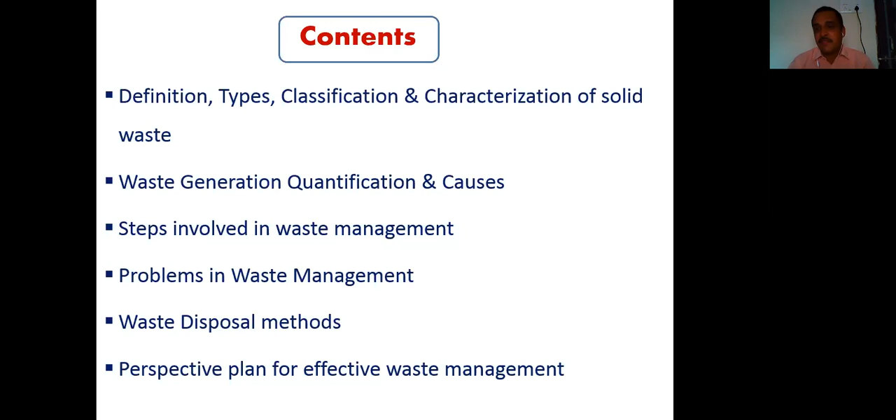Then there are different types of waste disposal methods which are currently practiced in different urban local bodies or urban centers. And at last, I'm going to suggest some perspective plans or better steps for effective waste management. So we are going to study them one by one. Firstly, we will study what is meant by solid waste.

The term solid waste is any unwanted material which is thrown out into the environment by human beings. For example, we bring a biscuit or a chocolate from a shop. We consume that biscuit or chocolate by tearing the wrapper. And after consuming, we throw that wrapper or the packet of the biscuit in our dustbin. That wrapper or packet itself becomes waste. It's a simple example of solid waste.

Then there is another definition. There are a number of definitions. The waste which is generated in a solid state, particularly as a result of various human activities, that is, residential or commercial activities, and which is normally described as useless or unwanted material, is known as solid waste.

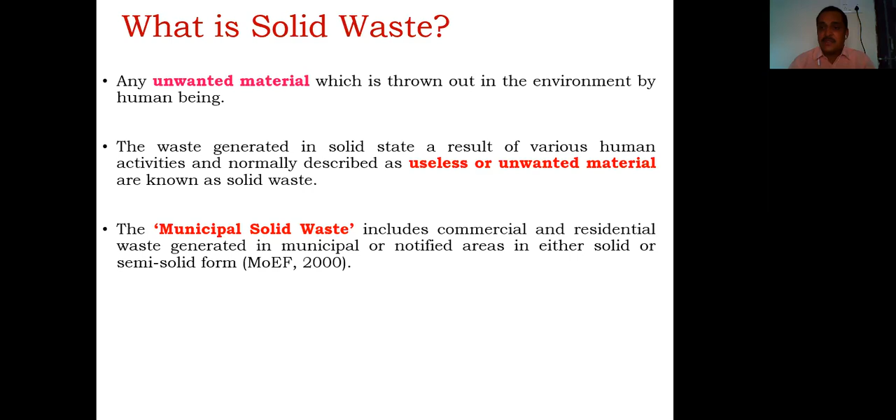According to the Ministry of Environment and Forest, the term municipal solid waste includes the commercial and residential waste generated in municipal or notified areas, meaning the waste generated in the jurisdiction of a municipal council or municipal corporation. These wastes are recognized as municipal solid waste, in either solid or semi-solid form. So these are some common definitions of solid waste.

Then in the next part, there are different types of solid waste which are recognized. For example, municipal solid waste. In a previous slide, we have already studied what is meant by municipal solid waste. That is simply the waste generated in municipal notified areas or in the jurisdiction of a municipal corporation.

The second type of solid waste is industrial waste, the waste generated during the manufacturing process. We are processing the raw material and preparing a final product or byproduct, and what remains after that processing is called industrial waste. The characterization of industrial waste depends upon the raw material used, the manufacturing processes, and other aspects involved in that particular industry. That means it varies from industry to industry.

Then there is a third type of waste, called hazardous waste. Hazardous waste means waste having properties like flammability, ignitability, corrosivity, and carcinogenicity. These are some common properties of waste recognized as hazardous. Another type of solid waste is electronic waste. We use different electronic gadgets or appliances in daily life, and after the completion of their life cycle, or due to some unavoidable reasons, we throw them away and they become electronic waste.

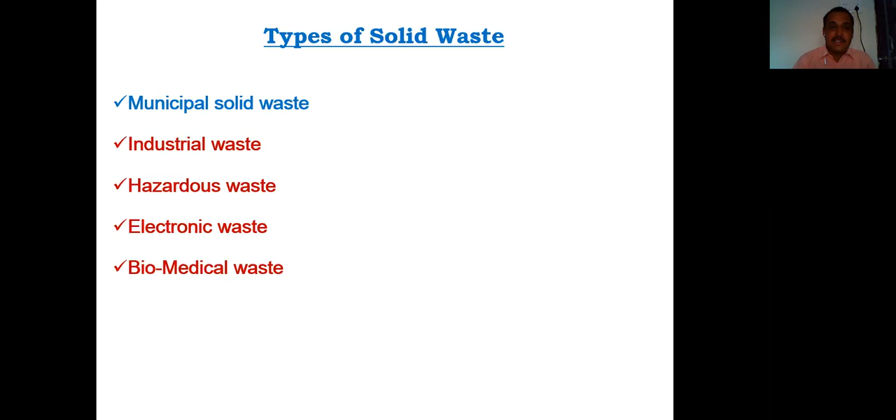Another important type of waste is biomedical waste, which is generated from clinics, hospitals, or health centers, such as cotton balls, wound healing materials, or other materials generated during health or medical practices. So these are some common types of solid waste. But among these types, we are mainly concerned about municipal solid waste, as we deal with this aspect in our day-to-day life.

Then, after studying the types of solid waste, there is a classification of particularly this municipal solid waste. Again, this municipal solid waste is broadly classified into two types. First is the degradable portion of solid waste, and another is the non-degradable portion of the waste. Among the degradable category, there are different types of waste. For example, food waste, then paper material which is thrown away, then leather material, then the fine earth and the ash material.

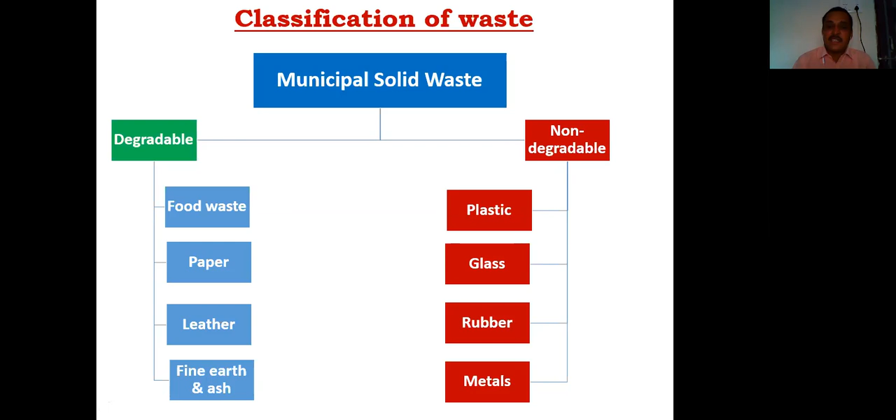These materials are mostly generated during street sweeping activities. Then the second category is the non-degradable items, particularly plastic material, then glass, then rubbers and metals. These are some common waste items which belong to the non-degradable category. It means that the municipal solid waste is broadly classified into two types, that is degradable and non-degradable.

And when we study the waste generation statistics, it means how much quantity of waste is being generated in a particular city, that is the per day or per year waste generation capacity, and besides that, the per person per day waste generation capacity. This is included in the waste generation statistics.

As per the census of India completed in 2011, about 31% of the Indian population resides in urban areas, and this represents a population of 377 million people. It means that a major portion of the Indian population has shifted from rural areas to urban areas in search of employment, health, and educational facilities. These are various reasons for the shifting of this population.

So there is a direct relationship between the increasing trend of the urban population and waste generation. That's why we study what percentage of the population resides in urban areas or urban centers. This population generates about 1,43,449 metric tons of solid waste per day, as per the Central Pollution Control Board reports.

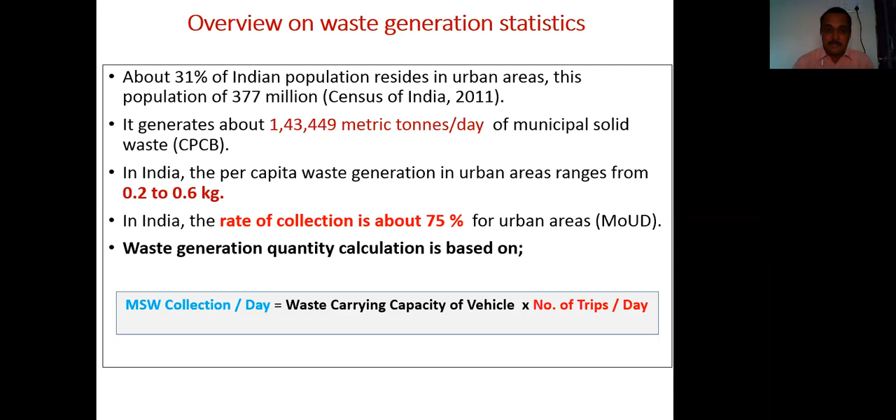If you study the waste generation in the top 10 Indian cities, in this table we have 10 cities, their waste generation in tons per day, and the last column represents the kilograms per person per day of waste generated, also called per capita per day. For example, Kolkata generates nearly 12,000 tons of solid waste per day, and the per capita generation is 0.66, approximately

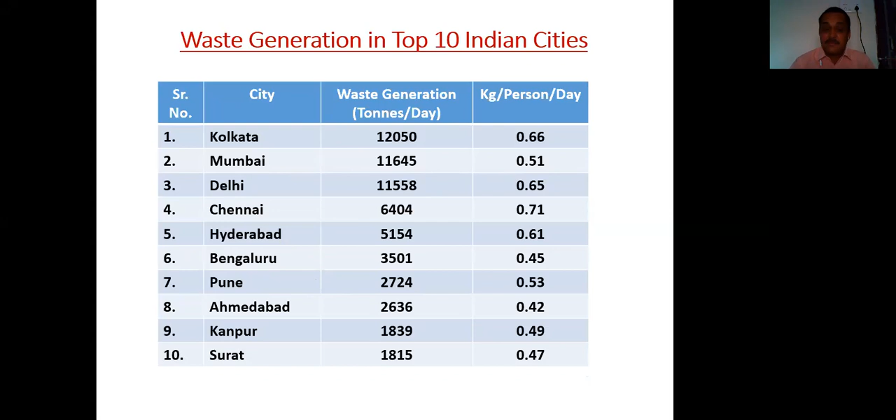600 grams. Another example from our Maharashtra is Mumbai, generating nearly 11,000 tons of solid waste. Pune generates nearly 2,724 tons of solid waste. Likewise, these are the top 10 cities in India as reported by the Central Pollution Control Board. These cities generate that much waste per day, which is calculated by the formula we highlighted in the previous slide.

Another aspect of solid waste is its characteristics. The characteristics of solid waste vary from place to place, depending on where the waste was collected or generated. Suppose we are collecting waste from a slum area; the characterization of waste, its properties, will be different. If we are collecting waste generated from high-profile societies, the characteristics are again different.

There are some factors influencing the quantity of waste generation and its composition, meaning the degradable or non-degradable portion. For example, living standards of residents: whether these people are from an average income group, a below-income group or a high income group. On the basis of income group their living standards depend, and on the basis of living standard, the waste generation characteristics or composition change.

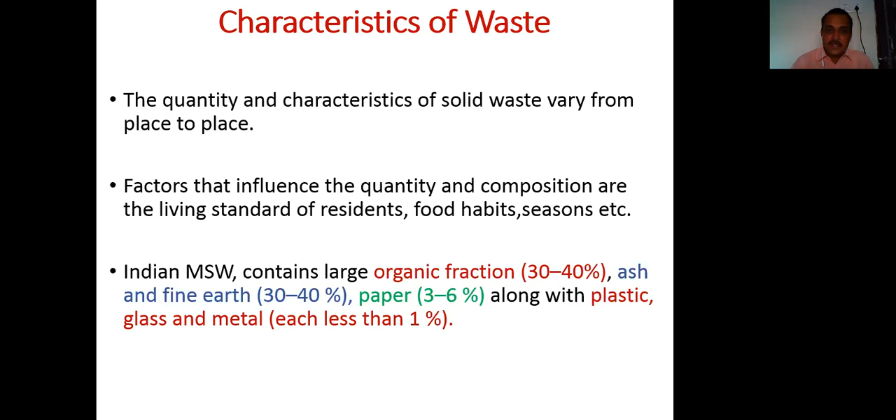Another study, carried out by NEERI and the Central Pollution Control Board, found that Indian municipal solid waste contains a large organic fraction, the degradable portion, that is 30 to 40%. Then ash and fine earth, collected during daily street sweeping in different cities, is nearly 30 to 40%. Paper is 3 to 6%, along with plastic, glass and metal, categorized as non-degradable or recyclable material, which is less than 1%. This is the characteristics of municipal solid waste in a particular area.

Then what are the causes of increasing solid waste? In the previous slide we studied how much waste is generated per day in Indian cities. Here we are going to study the causes of the increasing quantity of solid waste generation. These are some common points to be considered. The first is increase in human population.

As we know, at the time of independence India had a population of nearly 40 crore. And now we have crossed a population of nearly 130 crores. This increase in human population is one of the important aspects, as the per capita per day waste generation increases as the human population increases. So there is a direct relationship between the human population and the per capita waste generation to be considered.

Another aspect is the migration of rural people to the urban areas, because most of the rural population, for different reasons, for example in search of employment, better health or education facilities, get shifted to the urban areas. And once they shift to the urban areas, the size of the city also increases, meaning there is an increase in the population of urban residents, which directly affects the waste generation statistics. And it ultimately leads to the third point, the process of urbanization. This process of urbanization itself speeds up or gears up the per capita per day waste generation.

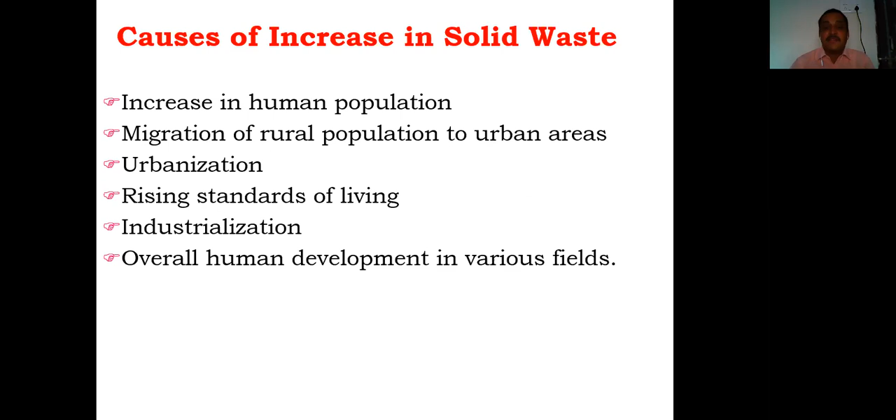And at last, there is overall human development in various fields: in the health sector, technological sector, automobile, and industrial sectors. These developments may also gear up the increase in the quantity of solid waste. So these are some basic points which have to be considered before starting the study of the actual process of solid waste management.

Then there are some steps involved in the process of solid waste management. These are some basic steps: generation of waste, collection of waste, storage of waste, segregation of waste, then transportation of waste, that is from storage sites to the dumping sites, from the city area to the dumping site. And the last one is disposal, the treatment facilities or treatment methods employed by that particular city area. So we are going to study these steps one by one.

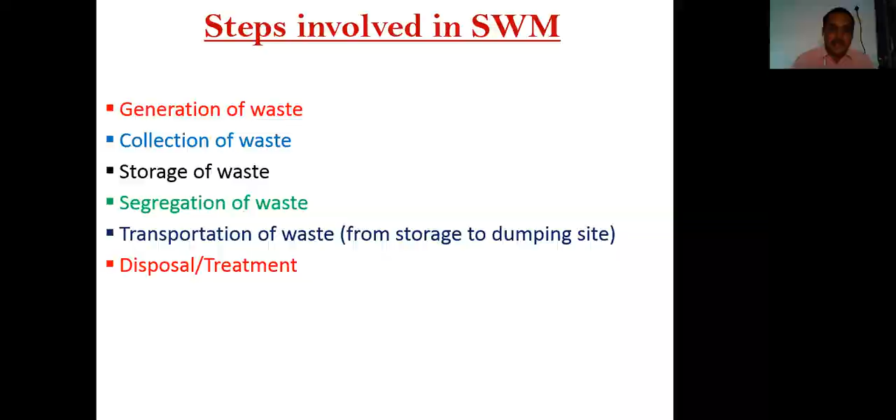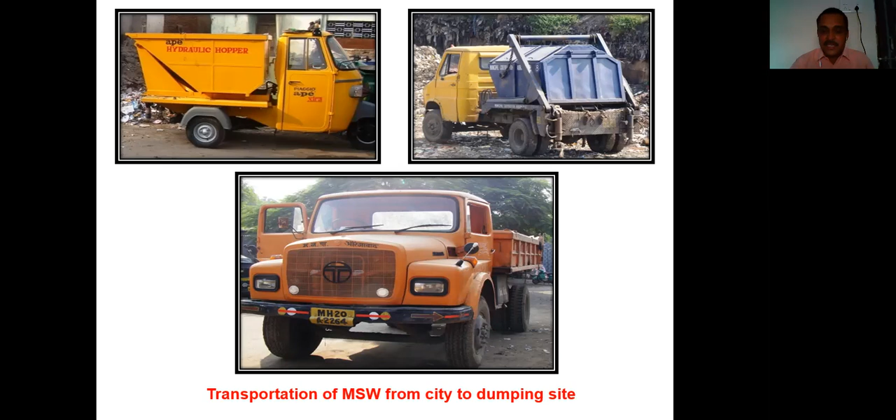Then as far as the transportation of this waste, whatever waste is being stored in open dumps or storage spots, which were highlighted in a previous slide, that waste is being collected and transported from city areas to the dumping sites or dumping areas for further process.

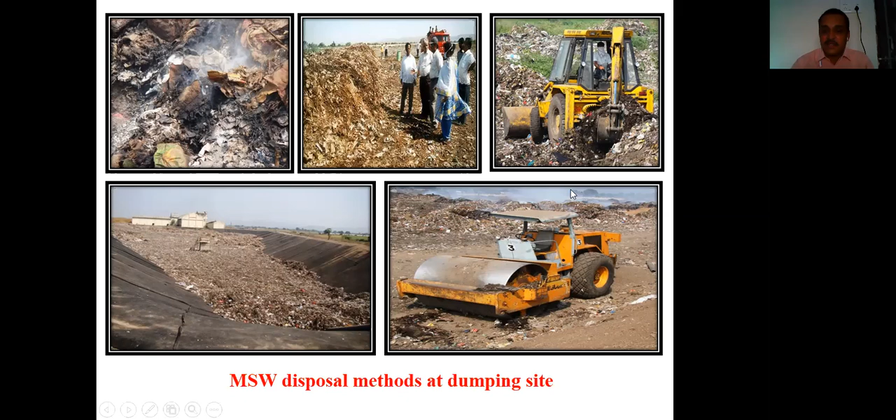So these are some common steps which are involved or we observe in solid waste management practices. And these are not an example of one city. We found these municipal solid waste management practices all over India. These practices are common. After studying the steps or processes of solid waste, there are some problems during these municipal solid waste management practices.

For example, the first major hurdle we found in municipal solid waste management is the inadequacy in the baseline information. So what is the baseline information? The baseline information about municipal solid waste management includes how many dustbins are used in a particular area, how many workers are engaged for municipal solid waste management. So these are some common or basic baseline information.

Apart from that, we have already focused on the issue of waste generation statistics, and it is estimated by rough calculation. There is no scientific method, what we call a weighing method, being applied. So whatever baseline information we had is available on the basis of our general considerations only. So that is the major hurdle in municipal solid waste management.

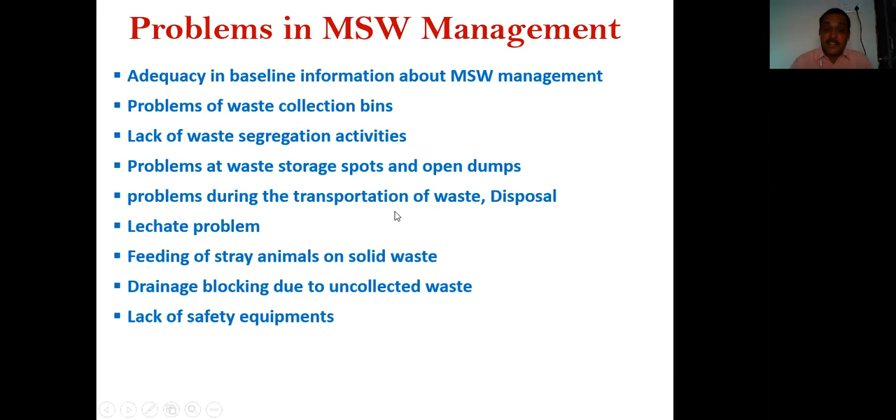Another problem is that animals, particularly stray animals, are taking out that waste material and spreading it all over that particular area. So the objective of collection bins is not achieved here due to the reluctant approach of the residents and the monitoring authorities also.

So that is the first issue which we are going to observe in all cities or urban areas. One of the important aspects, as we discussed, is the waste segregation activities. As we know, the municipal corporations are not engaged in segregation activities at the collection site or at the generation site. In most cases, particularly women and small children, whom we call rag pickers, separate or segregate that waste. They pick only the glass bottles, plastic, or metal parts.

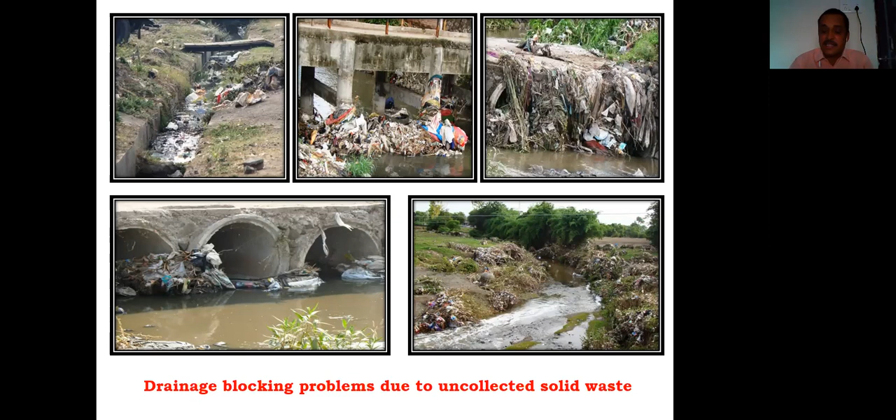Then another important aspect concerns the waste management personnel or staff, particularly the sweepers, engaged in the practices of waste collection. As we consider the health aspect of these persons, it is very essential to use safety measures, which we call personal protective equipment, PPEs. These PPEs are to be provided by the municipal councils or the corporation, that is, the urban local bodies in that particular area. What does personal protective equipment mean? It includes shoes, hand gloves, masks, and gum boots, to be provided by the corporations or the councils to these workers.

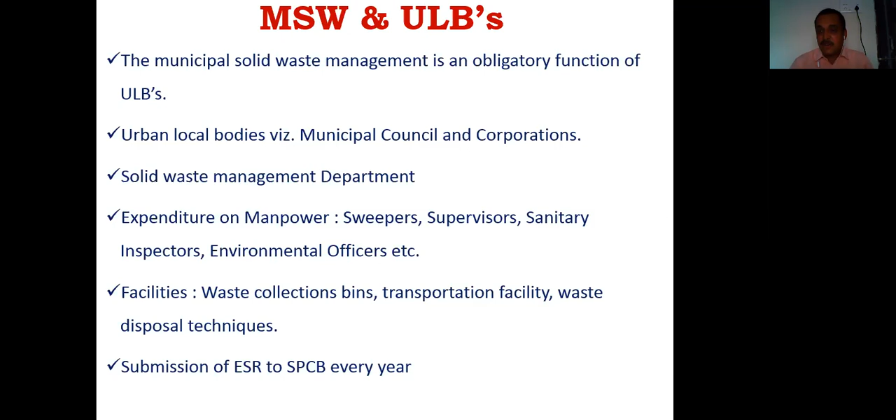or councils. And in this year's ESR, or environmental status report, a major concern is solid waste management itself. So this is the relationship between, or the role of, municipal councils or the urban local bodies in the case of solid waste management.

Then in the last part, we are going to study some waste disposal methods. These waste disposal methods are practiced in different cities. There are different waste disposal methods or techniques being employed by the concerned councils or corporations. But here we are going to study some common methods which are being employed for the disposal of particularly the municipal solid waste.

So the first is direct burning. People, particularly residents in urban areas who are not interested or don't have time to throw their waste in collection bins or waste bins or at the dumping site, are just directly burning that waste. Particularly garden waste gets directly burned. So this is a waste disposal method.

But this has to be considered an unscientific method, as direct burning may create a problem of air pollution. So direct burning is not allowed or not permitted. If you see the provisions of the Municipal Solid Waste Management Handling Rules 2016, if you burn this municipal solid waste directly, you will be fined by the concerned corporation or council. So this practice is not considered a safe or scientific method.

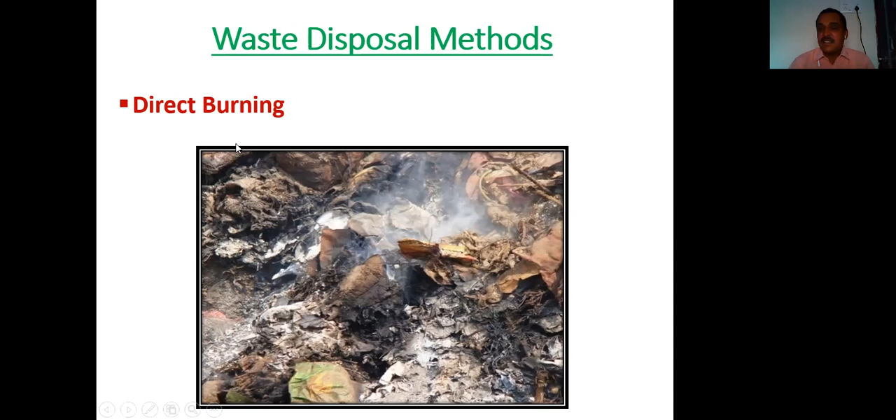Then there is another method, which we call the landfilling method. Apart from landfilling, in some cases open dumping is generally carried out by some corporations or councils due to the lack of landfilling facilities. But in some metropolitan cities where the corporation is spending a lot on waste disposal facilities, they adopt sanitary landfilling practices.

In such landfilling practices, the waste is dumped into a large pit, and this pit has a high density polyethylene liner, which we call HDPE polythene sheets, and we put the waste on this material, with alternate layers of soil and portions of degradable and non-degradable solid waste. And after filling that site, it gets covered with soil and is kept as it is for a long period of time.

That is sanitary landfilling, which avoids the problem of leachate formation and vector-borne diseases. It is considered one of the scientific methods. And during the construction or installation of sanitary landfilling facilities, there are some points which have to be considered: selection of site, survey of site, monitoring of site, and construction of site. There are also some legal and technical issues involved in sanitary landfilling practices.

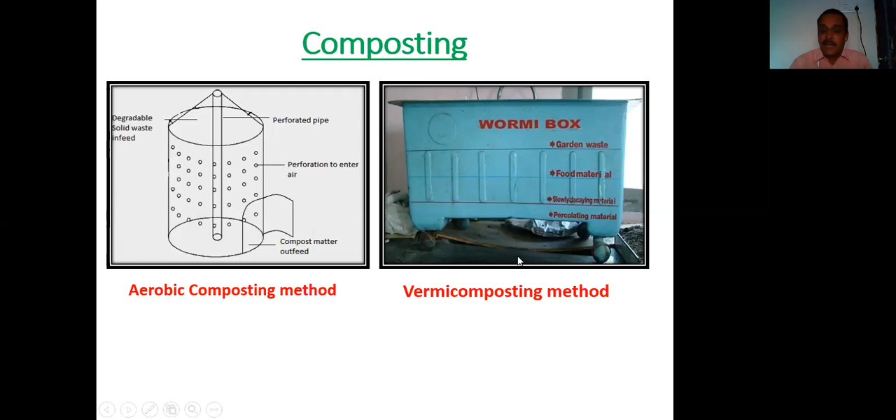Then there are some methods which are generally practiced in our urban centers. These methods belong to an anaerobic category. For example, the Bangalore method. In the Bangalore method, a pit is dug, and in that pit we put one layer of solid waste and one layer of night soil, again a layer of solid waste, another alternate layer of night soil, and that is covered with a layer of soil.

So this is a common method, but due to some disadvantages, the Bangalore method is nowadays not practiced in urban centers, as it has a problem of odor or nuisance due to the night soil during the composting process itself.

Then there is an Indore method which is also used. This is similar to the Bangalore method, but in this case the method does not include night soil, and here we provide a facility for supply of air. So these are some common methods, but the Bangalore and Indore methods are not generally practiced in our city areas or urban dumping sites.

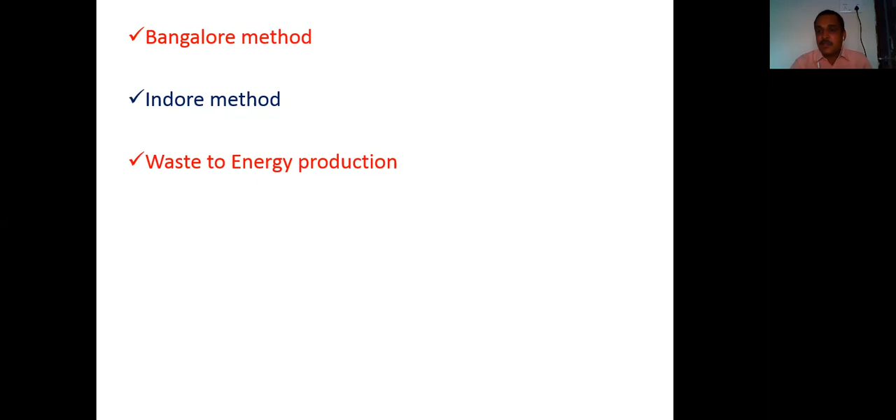So these are some common waste disposal facilities or methods practiced in India or in our city. So at last, in this particular topic, we have studied solid waste from its definition to the disposal methods. But in whatever process we have studied, we have also highlighted some issues or problems which are responsible for reducing the effectiveness of solid waste management.

So here, my attempt is to suggest some steps for better or effective solid waste management, how we can apply an effective solid waste management process for our city or urban centers. For example, we have to upgrade our baseline data.

As I have already told, we need data about our waste generation that is actually scientific data, not based on rough estimates only, not based on the waste carrying capacity of the vehicles and their number of trips. This is not called scientific data. Those are the rough estimates we have considered for the generation quantity. Then collection facilities. We should have an exact number of collection bins. We should have an exact number of waste storage spots.

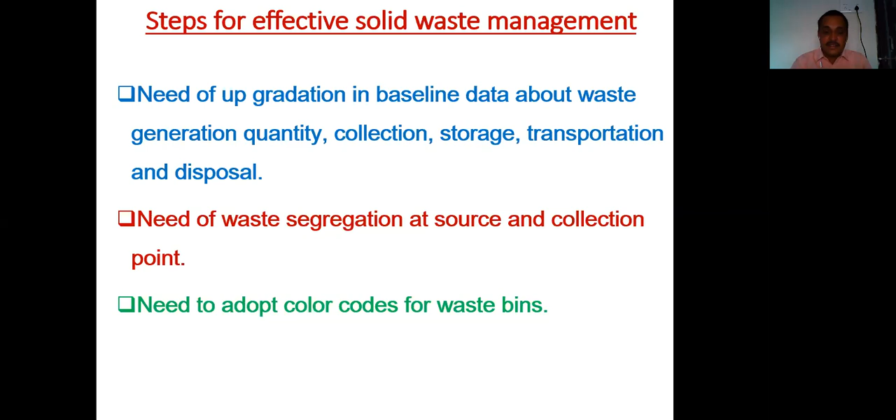Means, for example, for the degradable portion of waste, we are going to use green color bins, dust bins. For the non-degradable portion of waste, we are going to use a red color bucket. So these are some common steps we have to take for effective solid waste management.

Then there is a need to implement the guidelines which are issued by the concerned pollution control board. In case of our state, that is the Maharashtra Pollution Control Board. Then the corporation should promote the use of personal protective equipment, that is PPE, for their sanitary workers, particularly the sweepers, who use shoes, masks, or hand gloves at the time of waste collection and waste transportation itself.

Then there is a need of effective implementation of the Solid Waste Management Handling Rules 2016, because as compared to the solid waste management handling rule formulated in 2000, the 2016 rule has some additional guidelines. For example, if you observe the Solid Waste Management Rules 2016, every person or every individual is responsible for disposal of his waste. So effective implementation of this rule is needed for our waste management.

And again, one of the important aspects is we have to inculcate awareness amongst the residents or citizens through different tools. For example, media. It may be print media through newspapers; the municipal councils or corporations or the experts in that particular area have to write articles, make some posters, and give some pamphlets or information through this media. Then electronic media is also going to play an important role in solid waste management. So this awareness program is very, very needed.